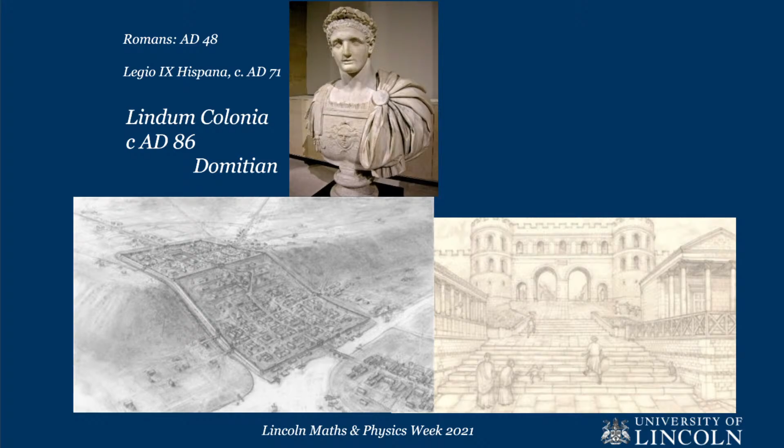This quite old city was founded by Romans already in the 1st century AD, just a few years after Romans came to the British Isles. Once it was a base of the famous 9th Legion Hispana, before the legionaries moved to York, and the place became home for retired legionnaires, receiving the prestigious status of colonia already in the time of Emperor Domitian, making it a very comfortable place for retired legionnaires to live. Even now you can still see remains of Roman times, like the surviving Roman arch, under which you can walk or drive. In fact, it's the only Roman arch in the British Isles under which traffic is still allowed.

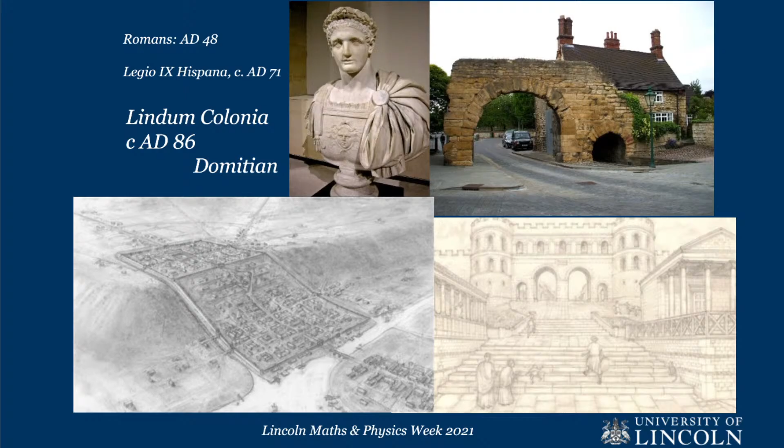The next big step in Lincoln's development came about 1,000 years later with other visitors, William the Conqueror and his team. They found that the spot the Romans considered an important strategic place was good to build a castle, and the famous castle of Lincoln was built. Opposite this castle was built an even more famous cathedral, Lincoln Cathedral, which some consider the most beautiful cathedral in the British Isles, and probably one of the most beautiful on Earth. For sure, for a substantial period of time, about 200 years, it was the tallest building on the planet, when its wooden spire was still in place.

As cathedrals were the oldest seats of learning already from the Middle Ages, however, a university was only opened in Lincoln at the end of the 20th century. The first building was built on the beautiful waterfront, and since then the university has grown quite a lot. Our School of Mathematics and Physics is perhaps the newest school in the United Kingdom, built from zero in this ancient city, with the modern campus opened in 2014. We share our base building, named after another famous person from Lincolnshire, Isaac Newton, with the School of Computer Science and Engineering, and our building will be just 4 years old next month.

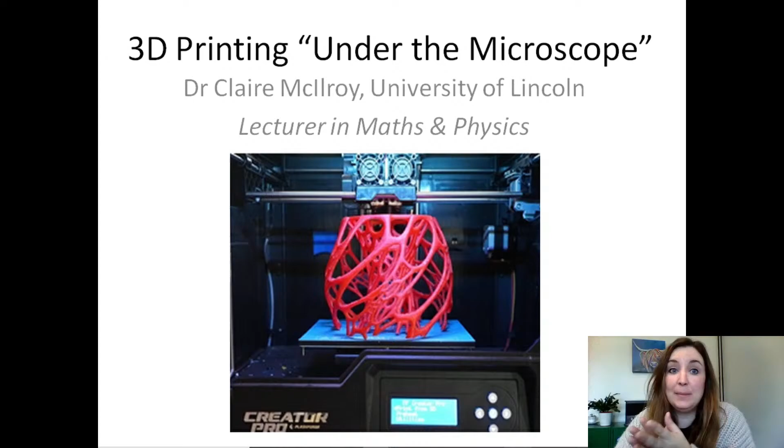So I'm a mathematician, so I like to use a mathematical approach to improve and optimize various processes. Most recently I've been interested in manufacturing, so how we make things and how we can improve the things that we make, whether that be making products that are stronger and more sustainable, or products that are more easily recyclable.

I think these are really important questions that we should be asking and indeed solving for our manufacturing processes. So today I wanted to talk about a fairly new manufacturing technique, and that is 3D printing, or is sometimes called additive manufacturing. And in particular, I want to talk about 3D printing with plastics.

So plastics, and in particular single-use plastics, have had pretty bad press recently due to the impact they're having on the environment. But actually, if we can make plastic products that are stronger, more sustainable, more readily recyclable, then this is potentially a better solution to some of the non-plastic alternatives being proposed, which each have their own environmental issues. These properties—strength, durability, recyclability—all come down to the properties of the plastic material itself.

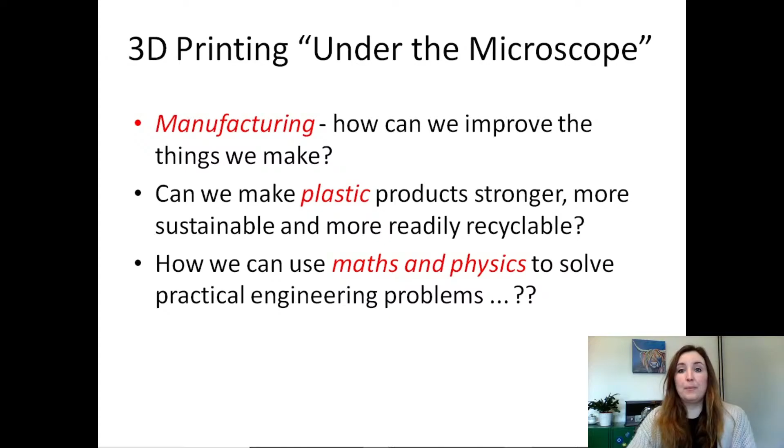So there are a number of key advantages for 3D printing in manufacturing. First off, it is a pretty cheap process, so you can pick up a decent desktop 3D printer for just a couple of £1,000, and actually Aldi was even selling a budget version in their middle aisle at one point. The ink or feedstock we use for this printing also comes in relatively cheap, at £40 a reel. It's also, in principle, relatively easy to set up, so there's very limited training costs associated with 3D printing. I say in principle, because I'm going to show you some of my attempts at using the 3D printer a little bit later on.

Next, 3D printing is additive. This is in contrast to a lot of traditional approaches that are subtractive. So the idea is, to make a product, you would start with a block of material and shape that block into your product by cutting, grinding, drilling, or removing material—this creates a lot of waste. 3D printing, on the other hand, is additive: you build up your product layer by layer using only the material that is required. So there's huge potential here to reduce the amount of waste material produced during your process.

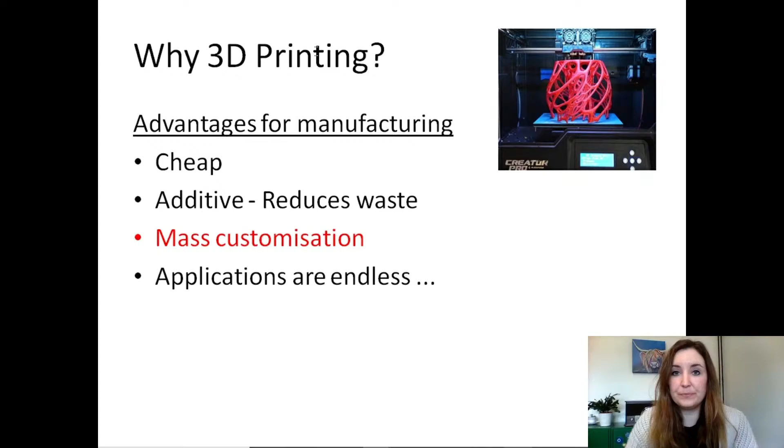First off, we've been 3D printing prosthetics for quite some time now, for humans and for animals. I think this application really highlights how 3D printing can create customized products that are fit for the user's needs.

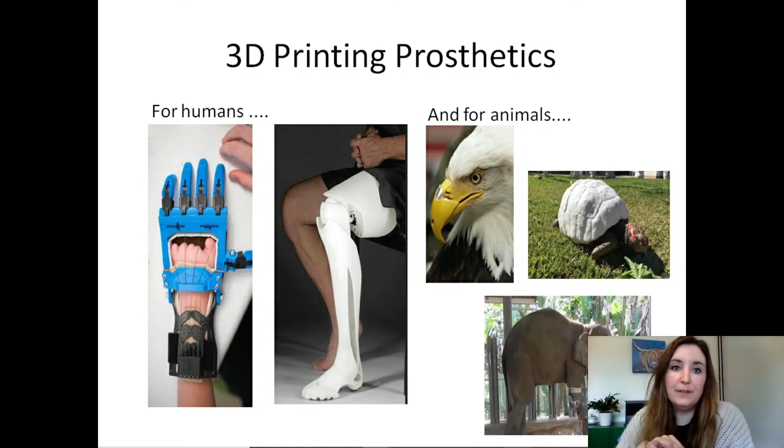Another nice example in nature is that we've been using 3D printing to rebuild our coral reefs.

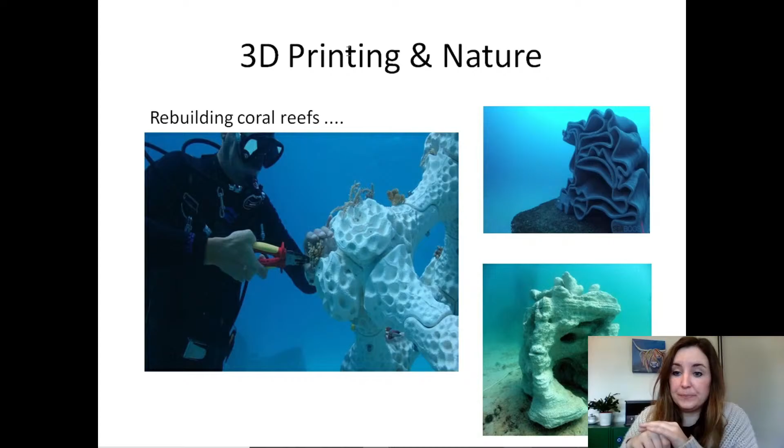Another example in the medical theme: it's common practice now to use 3D printing in tissue engineering. The idea is you can 3D print tissue scaffolds with quite complicated geometries that replicate a tissue or an entire organ. Then you grow cells on these 3D printed scaffolds. If you choose the right plastic material, you can make these tissue scaffolds biodegradable, so when implanted into the patient, the scaffold will eventually degrade away in the body.

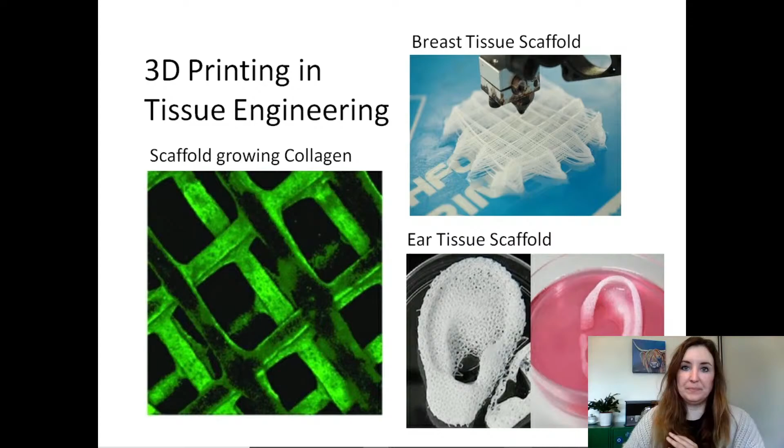There's also a lot of interest in using 3D printing in the sports industry. This highlights how we can make personalized products depending on the athlete's requirements. Using 3D printing with plastics, we can focus on making equipment with enhanced protection exactly where you need it, while keeping the weight of that equipment to a minimum.

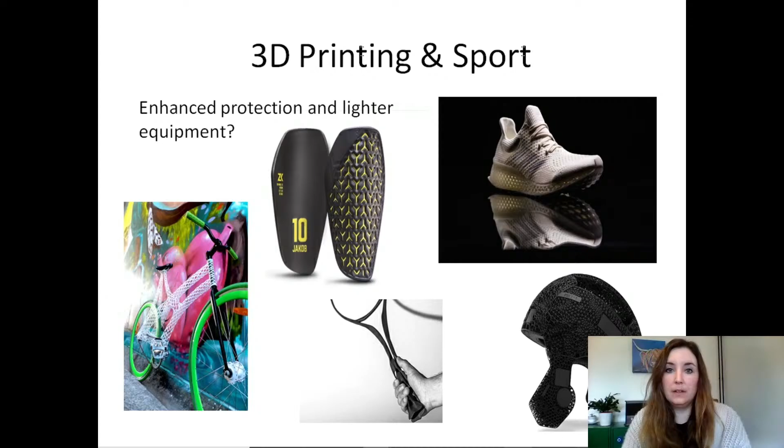3D printing is excellent for making tools on demand. I think every university experimental lab in the country will have a 3D printer on hand just to make and replace small tools. So no more waiting for delivery if you break something.

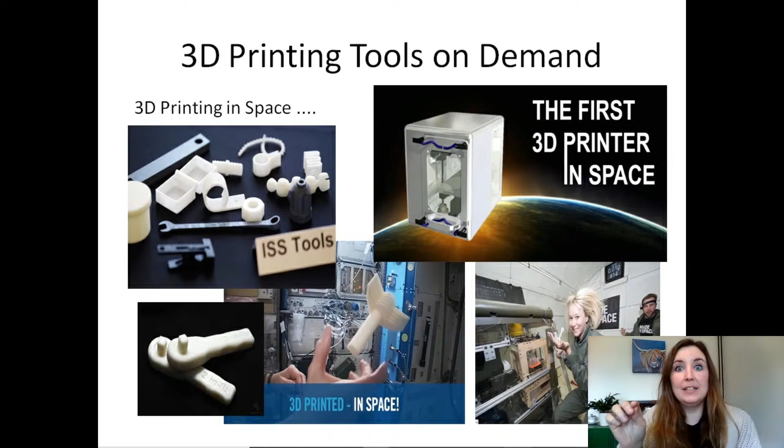But this really comes into its own if you start thinking about taking a 3D printer into space. There's huge potential here to massively reduce the amount of equipment and weight you need to take into space, particularly if you think about how you can recycle your 3D printed tools back through the printer to make new tools.

The Army is also really interested in 3D printing. An example here is printing drones on demand in remote locations. Also a nice example of some 3D printed army barracks out in the desert somewhere.

We've now got the capability to 3D print much larger scale structures from concrete based materials. This has really interesting implications, I think, for creating more affordable housing in the future.

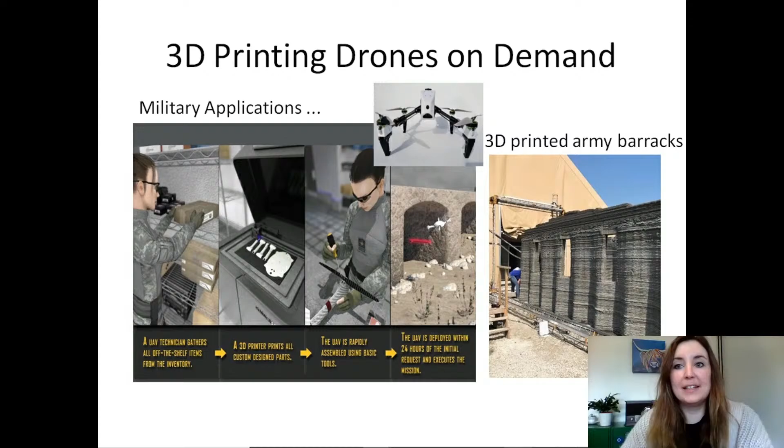The final application I wanted to share today is a bit of a strange one: we're now starting to see 3D printing emerge even in the food industry. Again, this highlights how we can make personalized products for various individuals, whether that's a custom design with chocolates, or thinking about people's dietary requirements, perhaps adding medication to food, creating meat substitutes, or creating more palatable food for vulnerable groups.

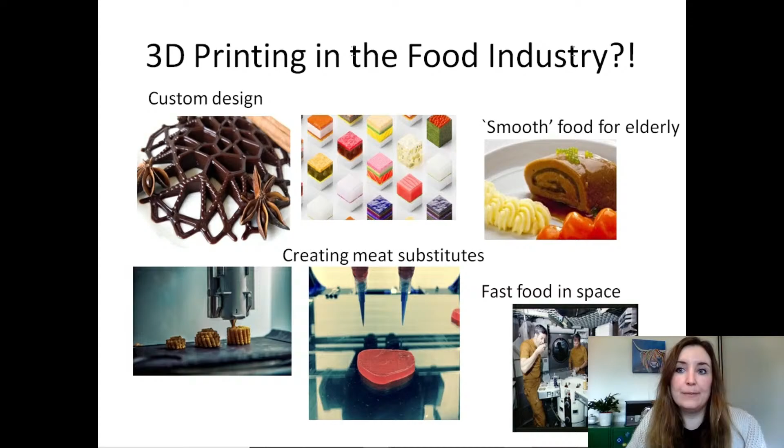The applications of 3D printing really are endless, and I'm sure if you go away and have a Google, have a YouTube, you'll find some applications that really excite you too.

So let's take a step back now and think about what's going on during this 3D printing process.

The ink for this printing process is a solid filament of plastic wound up on a reel. The idea is you feed this solid filament into a heated nozzle. This is an infrared image of our printing nozzle extruding material onto a build plate. The nozzles are really hot, operating at typically around 200 degrees centigrade, hot enough that the solid filament gets heated up and the plastic becomes molten, flowing through the nozzle until it reaches the nozzle exit and is extruded or deposited onto the build plate. The nozzle can move around in the XY plane distributing this material.

Now the trick is you need to cool off this hot molten plastic fairly quickly, otherwise it's just going to flow and spread out on your build plate. So the trick is to cool it down quickly enough that you deposit a nice cylindrical filament onto your build plate that you can then start building on top of.

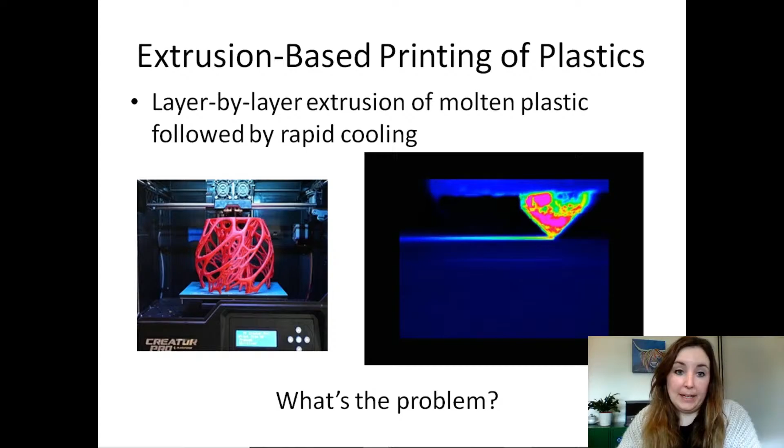So what's the problem? It turns out it's quite difficult to make your 3D printed parts look like the CAD design. As I said before, I'm a mathematician.

I did not spend any of my time at university in the labs doing experiments. I smashed way too many test tubes when I was at school, and that's one of the reasons I decided to take maths rather than one of the sciences.

But nevertheless, we had a 3D printer in our department, and everyone thought it was a good idea that I should have the 3D printer in my office so I could start doing some experiments to complement my mathematical modelling. So I took the 3D printer, read the instruction manual, and decided to give it a go. What could possibly go wrong?

This is one of my first attempts at just 3D printing a fairly simple robot design that I downloaded off the internet. As you can see, it did not go well. My office also smelt like burning plastic for quite some time after doing these prints.

It turns out it's really hard to get your print settings right so that you actually print something that looks like the CAD design. As you can see, after many trial and errors, kind of fiddling around with the printing conditions, I was finally able to get this little robot structure printed.

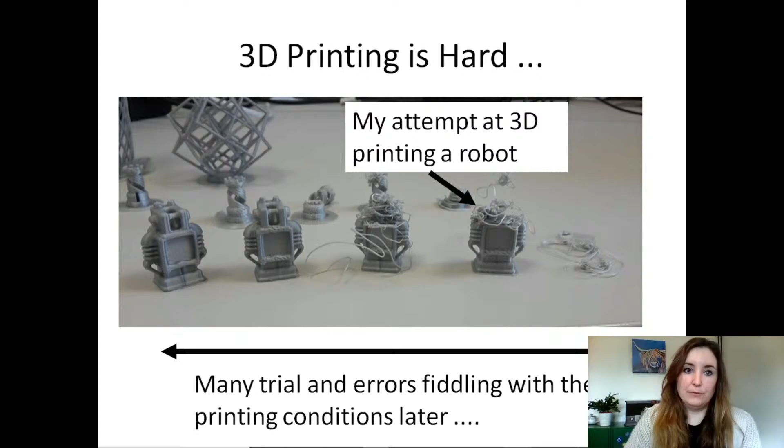As you've seen, this 3D printing is a layer by layer technique, so we make these layered structures where there's lots of joins or weld lines between those deposited filaments. And it turns out these weld lines are notoriously weak, so they debond or come apart very easily if they haven't had enough time to weld together, or equivalently if you haven't got your print settings quite right.

And so this is exactly what's happened to my robot here. The welds have just sprung apart and made this mess. And it turns out even if your weld visually looks okay, it's usually much weaker than what you would expect from your plastic properties. And you can measure this weld strength.

If experiments are your thing, you can start doing a mechanical test and tear along these weld lines and measure a tear energy. This is always just much weaker than what you would expect from the bulk properties of your plastic. So this is a real problem for 3D printed products.

So if we go back to our tissue engineering application I mentioned earlier, we need these 3D printed scaffolds to really withstand the weight of these cells as they're growing into a tissue. So if we've got these weld lines that are just going to spring apart as soon as they're put under some stress, this is just going to be an absolute disaster for your tissue scaffold, which will just collapse under the weight of the cells as they grow.

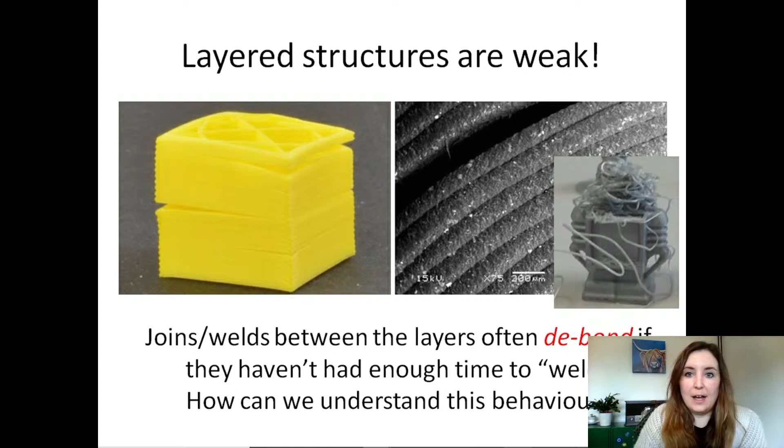So we really need to understand how we can fix this problem. We need to understand this welding process, and how we can define that there's been enough time to weld. To really understand this, now is where we need to understand what's happening at a microstructural level, what's happening to the molecules during this welding process.

If you had an infinite amount of time, then this interdiffusion process would eventually completely erase the weld line, so there would be no memory of there ever being a separation between the yellow layer and the blue layer.

So in 3D printing, we don't have infinite time, unfortunately. Our time available for welding or for diffusion is determined by how fast your material cools down. As soon as your molten plastic cools down and solidifies, that completely arrests this interdiffusion process. So all welding will stop once your material is solid.

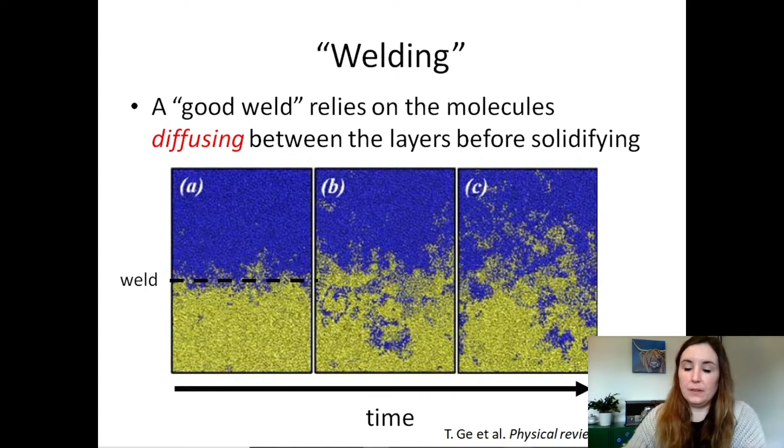We should also consider that we're not dealing with simple particles here. We've got a molten plastic material, and the molecules in molten plastic are really big, flexible molecules. They're actually very long chains of carbon atoms all joined together, and these chains are very flexible, so they can change shape really easily.

The way they diffuse depends on the shape of the molecule. If your polymer chain randomly coils up in a spherical shape, then it's going to diffuse around quite randomly - it's equally likely to move in any direction. If your polymer chain is somewhat stretched out and aligned, it might take a more elliptical shape. Due to the asymmetry of the ellipse, it's going to be more likely to diffuse along its principal axis, just because it's easier to move in this direction.

So the way the molecules diffuse depends on this shape, and the shape of the polymers depends on the flow that it has encountered. We know that this molten plastic has had to flow through this nozzle before being deposited on a build plate. That flow through the nozzle can actually stretch out and align your polymer chains, so they're going to look more elliptical rather than spherical. So to understand our welding problem, to understand how the molecules are diffusing, we actually need to go right back and understand how these molecules are behaving as they flow through the nozzle.

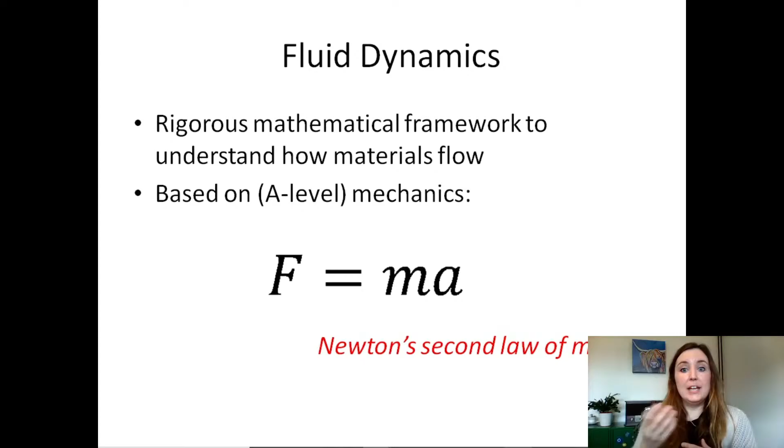Fluid dynamics is based on Newton's second law of motion, so F equals ma. This tells us that the total forces acting on an object must balance the mass of that object multiplied by the acceleration of that object. Or in other words, we can think of Newton's second law as telling us how an object will change its speed due to forces acting on it.

What makes things quite complicated in fluid dynamics is you can think of a fluid as a sea, if you like - pardon the pun - but a sea of lots and lots of interacting particles. Under this description, you have lots and lots of particles, each of which you can apply Newton's second law to. So as well as any external forces that act on the fluid, the way these particles interact will also tell you about the total amount of force within your fluid.

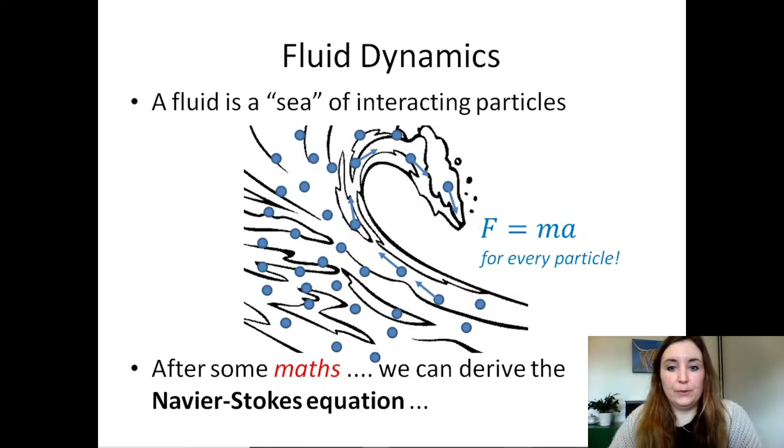These forces might be external, so it might be something as simple as gravity acting on your fluid, or it might be something internal to the fluid, due to those interacting particles. So it might be something like a pressure or something like a viscosity.

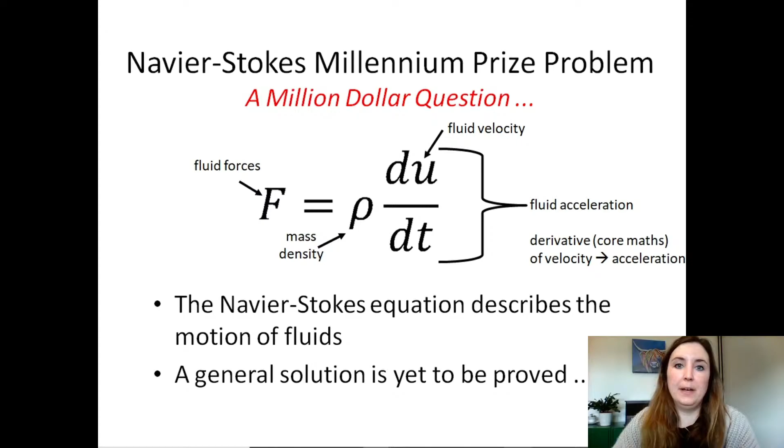The remarkable thing is that mathematicians are yet to find a completely general solution to the Navier-Stokes equation. What's even worse is that we don't even know whether a general solution exists. This is actually one of the Millennium Prize problems, where you will win $1 million if you can prove that these solutions exist, or indeed provide a counterexample to say that there are no solutions to this equation in general. So even though we can't solve this equation completely generally, we can apply it to our 3D printing problem and gain some insight into what's going on.

So let's start by thinking about how simple fluids behave - something like how water would flow compared to how honey flows.

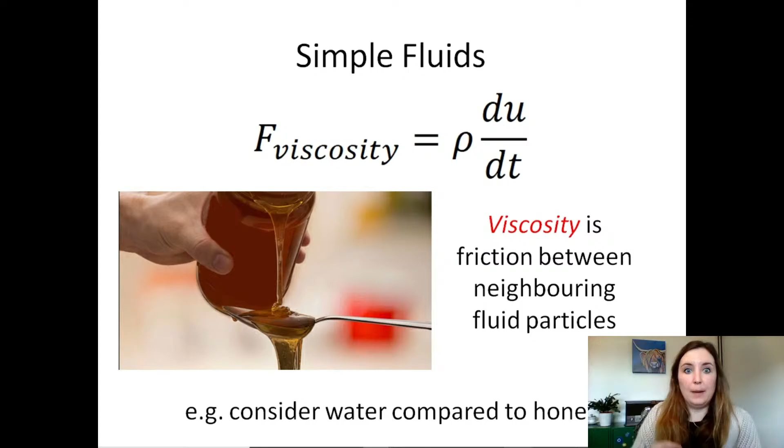In the absence of any external forces, it's simply the viscosity of the fluid that determines how fast it will flow. You can think of viscosity as the friction between neighbouring fluid particles in our sea of interacting particles. Something with very high viscosity, like honey, will flow much more slowly than something with lower viscosity, like water. It's much harder for honey to flow compared to water due to that increased viscosity.

Of course, we are not dealing with simple fluids. We have a molten plastic made up of really long, flexible polymer molecules, and these flexible molecules give rise to lots of interesting behaviours in molten plastics. First, they are shear thinning, meaning the viscosity actually decreases as you flow them.

A good example of where this is used in real life is with paints. The idea is you want them to flow really easily onto the wall as you're painting, but as soon as you stop painting, you don't want them to drip. So by playing around with the viscosity, we get these nice paint properties.

These molten plastics are also what we call viscoelastic, meaning they show both viscous and elastic properties. A good example is silly putty. You can stretch silly putty out and make it flow, accessing that viscous behaviour, or you can roll it up into a ball and bounce it, which is the solid, elastic-like behaviour.

These complex fluids also do really funny things when you start stirring them. If we think about stirring a simple fluid, like your cup of tea in the morning, this is essentially water. Think about what happens to the free surface of your tea as you stir it: the surface will always tend to dip down around your spoon for simple fluids.

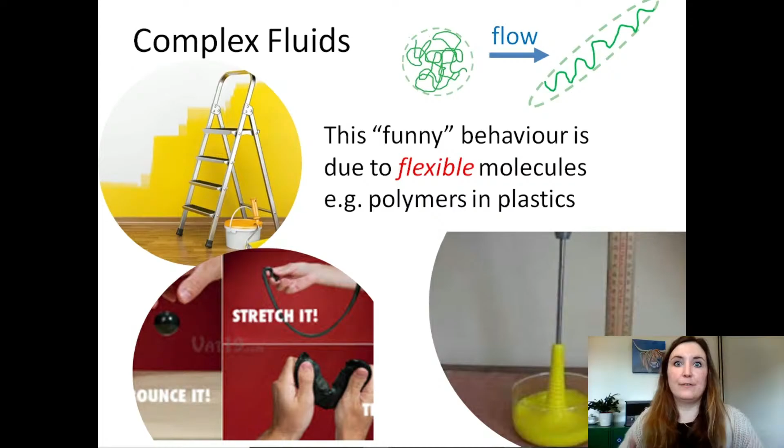So how are we going to think about these flexible molecules mathematically? The key is to think of each molecule as a couple of beads connected by a single spring - this is called a bead spring model. The two beads provide the friction of that molecule, or the viscosity if you like, and the spring provides the elasticity, so it can stretch out and relax, giving that elastic-like behaviour.

It turns out we understand springs pretty well due to Hooke's law - we know the force in a spring is just proportional to the displacement of that spring, x. So we can represent our polymer molecules as this dumbbell, if you like, so we can get stretch and relax in a flow, and we can also get the dumbbell orienting in the flow as well.

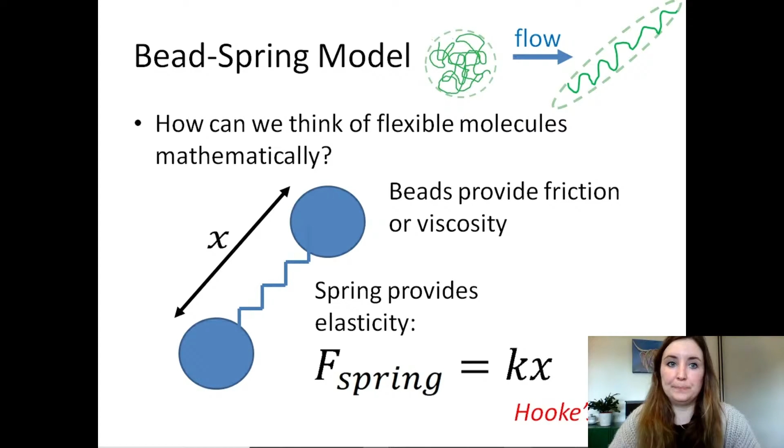It turns out these molten plastics are a little bit more complicated, because there are lots and lots of these polymer molecules all at very high concentration. The way I like to think of them is like a big bowl of spaghetti, where all these spaghetti strands are really well entangled with their neighbours.

Mathematically, we can still represent our polymer chain as a spring to give us that elastic behaviour, but this spring is actually restricted to a hypothetical tube region. This allows us to restrict the motion of our polymer chains, because to move around, those polymers are going to have to slide around between their neighbours. We capture this behaviour by using a tube model.

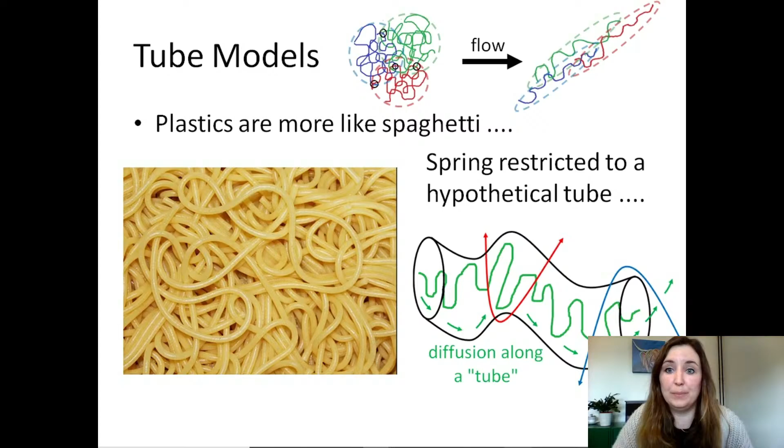Now we have a nice model to try and understand our 3D printing flow of a molten plastic material. We can have some viscous forces in our model from our beads in the bead spring model, and some elastic forces from our spring that's restricted to a tube. We know this has to balance the mass density multiplied by the acceleration of our fluid, just by Newton's second law.

So we might want to solve our model analytically if it's simple enough to do - get a pen and paper and go through the maths. Sometimes it's too hard to do this, so what we can do is start applying some mathematical methods together with a computer algorithm to derive an approximate but fairly accurate solution.

So that is what I did for this model. And we can start to think about how our polymer molecules are behaving in our 3D printing flow. So the beauty of the model is that we can actually pick out and visualize individual polymer molecules in our flow.

We've got my 3D printing nozzle here. We're depositing our plastic material onto a build plate, and you can see how the polymers become more and more stretched as they undergo this deposition process. You can also see how the polymers change their orientation as they go through this 90-degree turn. So what we end up with is this cylindrical filament that we deposited, where all the polymers are really stretched out and they're actually aligned in the flow direction.

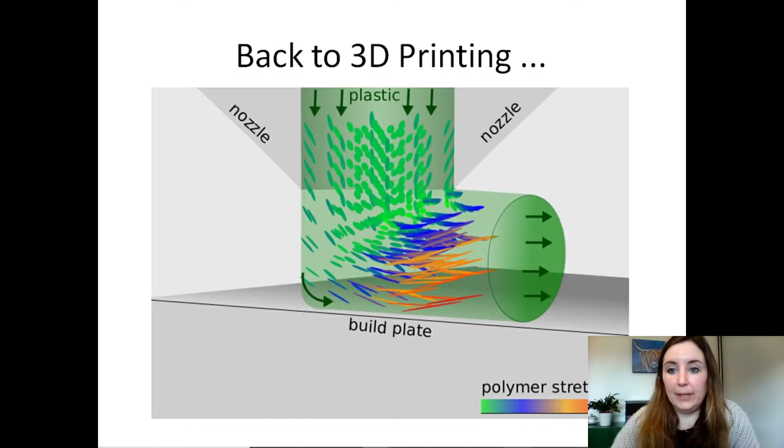Then the idea is we want this deposited material to cool down really quickly. So because the printed material has to cool down really quick, all that alignment of the molecules is actually frozen in when your filament solidifies. And that's exactly what our model predicts, and it predicts that we get most alignment in this bottom region here.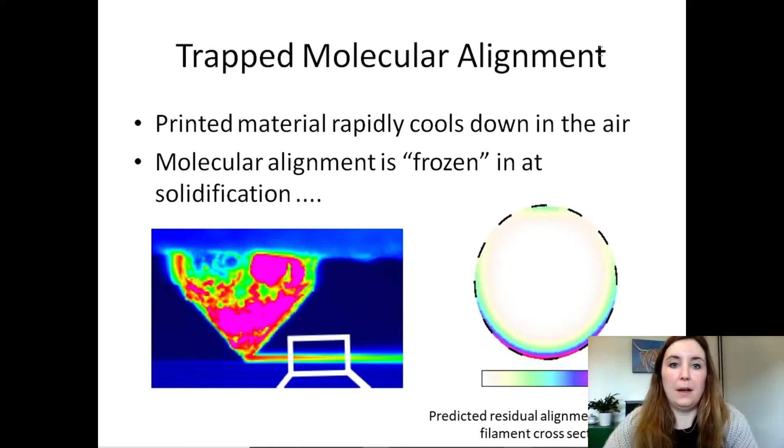So we have this deposited filament where all our polymers are going to be kind of stretched out and aligned in this region here. So how do we know that our model is telling the truth? We better check this with some real data, if you like. So what we can do is we can actually measure some molecular alignment with what's called a birefringence method.

Okay, so what does this mean for our welding process? What's happening is as our molecules are coming through this nozzle and undergoing this 90-degree turn, all the molecules are aligning parallel to the weld lines in our 3D printed object. So here's a simulation of what's going on. We've got a blue layer coming together with a red layer, and the molecules are highlighted in green.

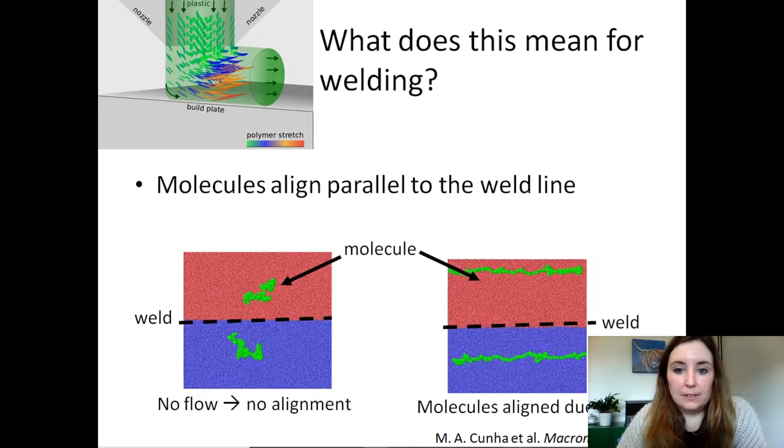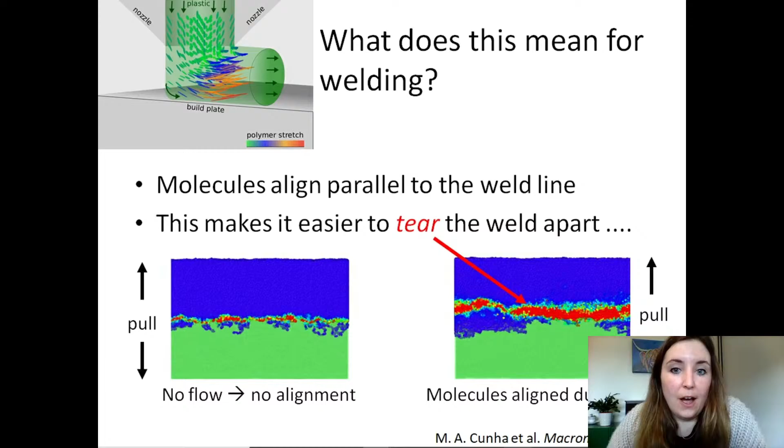On the left, we've applied no flow, so the molecules are just randomly coiled up and they're not aligned. But if we flow them through that nozzle, then the molecules are going to become really nicely aligned parallel to our welds. So if we then start to try and pull our weld apart, these aligned molecules make it much easier to tear the weld. In other words, where we have the aligned molecules, the welds are much, much weaker. So our model is telling us that due to this alignment from the flow through the nozzle, we're seeing this decrease in the weld strength.

So now we're really getting somewhere, right? We've developed a fluid dynamics model based on the molecular physics of this molten plastic material we're interested in. Our model predicts that molecular alignment due to the printing flow is going to compromise our weld strength in 3D printed parts. And what's even better is that we've validated this prediction against some experiments as well.

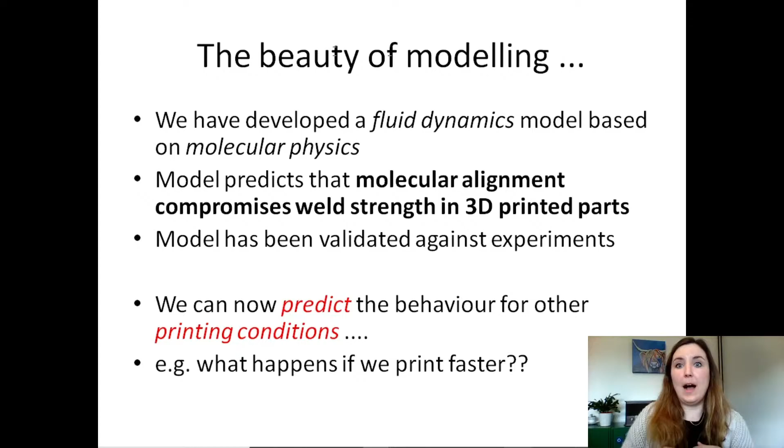So the beauty of modelling is now we can predict the behaviour for any other print condition we like without having to perform any further experiments. So one question we can ask is what happens if we print faster? If we print faster, we have to force our molten plastic through the nozzle at a faster rate. That increased force is going to stretch out our polymer molecules even further, so we're going to get an increase in the molecular alignment with increasing print speed.

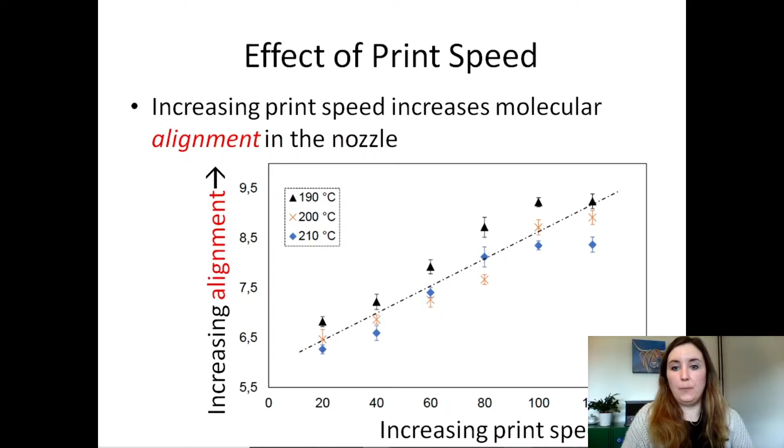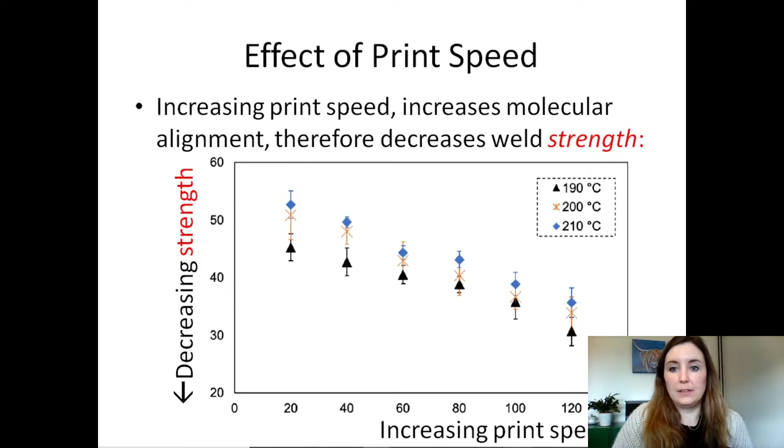So what does that mean for our weld strength? If we have increased molecular alignment with increased print speed, this is going to decrease the strength of our welds. So printing faster is really detrimental to building up the strength between these printed layers. Okay, so problem solved. What we've shown is that printing faster increases the flow-induced molecular alignment and consequently decreases the weld strength. So how can we fix this?

So the obvious answer, let's just print slower. But the thing is, if you go to your manufacturer and say, oh, we've solved your problem, you need to print slower, they are not going to like that, because printing slower to them means reduced productivity and increased costs. So what's really nice about mathematical modelling is now we can start thinking about what other variables we can play around with to reduce this molecular alignment whilst printing at a print speed that's acceptable to the manufacturer's productivity.

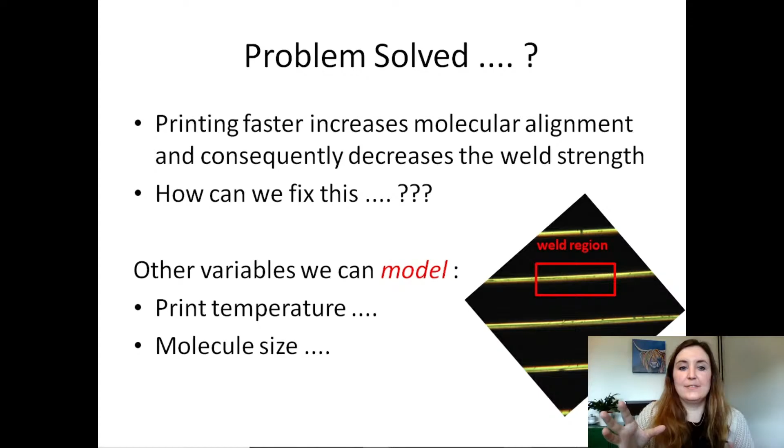So I'll just leave you with a couple of variables to think about. Have a think about how print temperature might affect this story, and have a think about how the size of the molecules might affect this story as well.

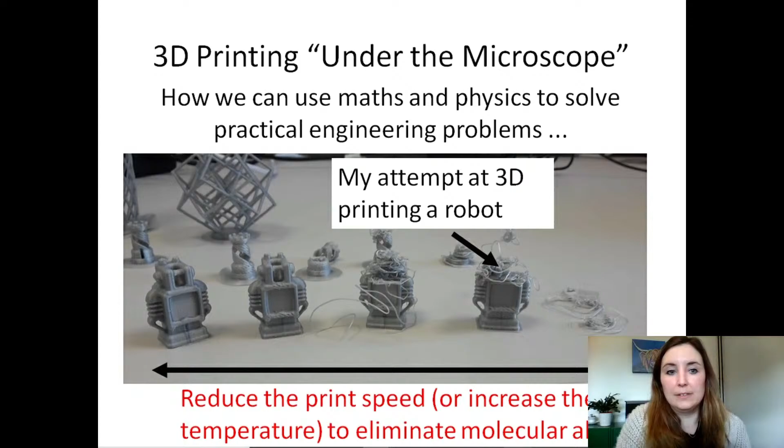So just to go back to my 3D printed robot, as I said before, I had to fiddle around a lot with the printing conditions to go from this disaster of a robot to something that looked more sensible. That fiddling around and trial and error amounted to either reducing the print speed or increasing the print temperature to eliminate that molecular alignment and allow the welds to bond together much more easily.

Finally, just to remind you that there are lots of people out there printing much cooler things than my sad little robot. This mathematical modelling approach is highly applicable to a range of applications, from medicine to aerospace to military applications. Thank you very much for listening, everyone.